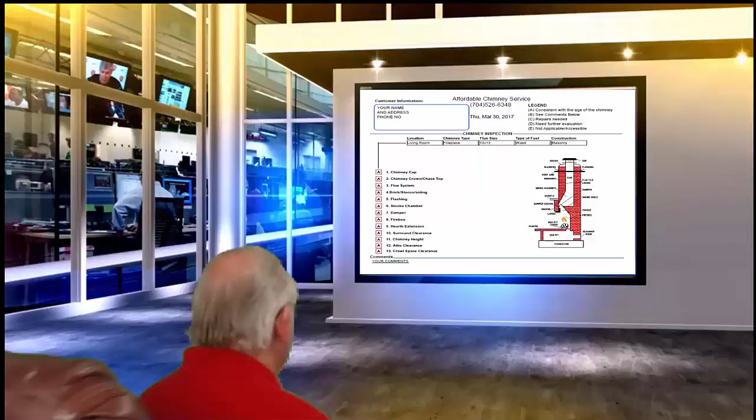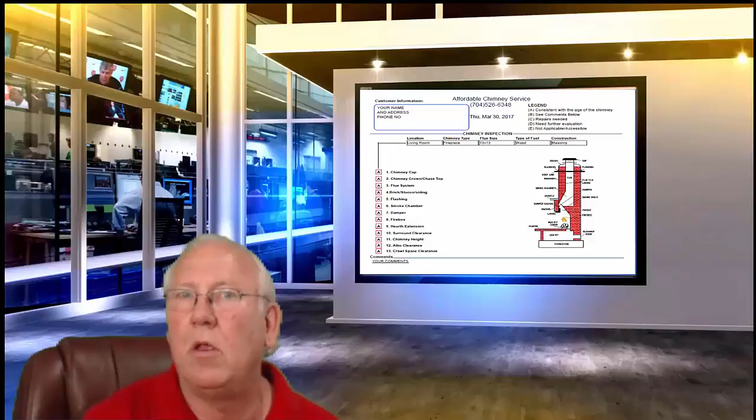I was just going over your chimney inspection report, but now that you're here, make yourself comfortable. Let's go over it together, shall we? Okay, now let's take a look at the inspection report and see how it reads out. This is a generic report. This is exactly what you will get, only your information obviously will be filled into all these blanks.

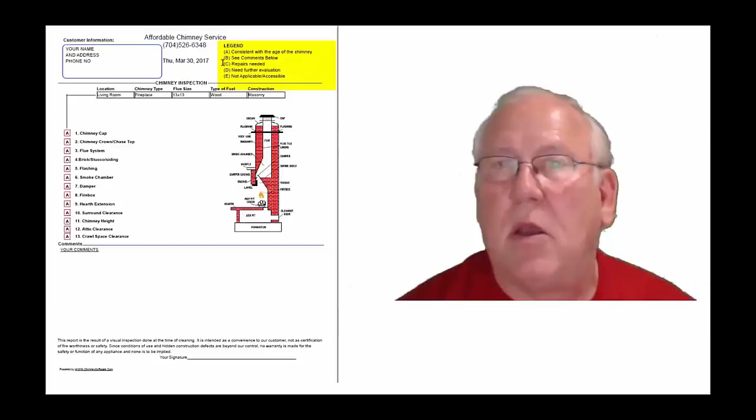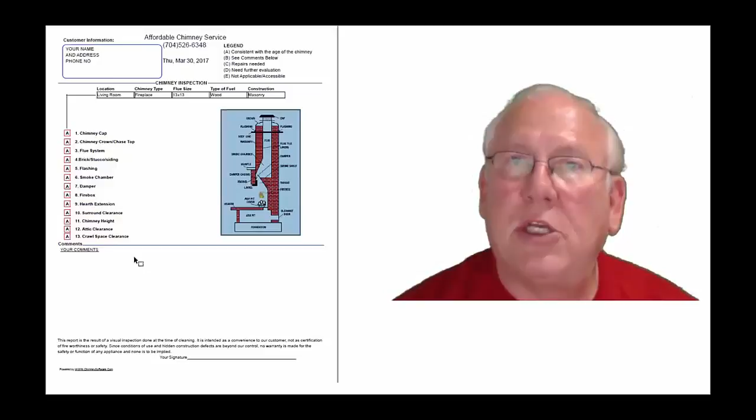The upper right-hand corner of the report is the legend. Each one of these initials pertain to something. A is consistent with the age of the chimney. B, see comments below. C, repairs needed. D, need further evaluation. Or E, not applicable. And they're placed into the boxes next to the parts of the chimney that can be easily identified in this diagram. And then, of course, you'll find my comments here below. Now, let's take a look at your personal report. So stay with me.

Hey, Sherry, it was great to see you out at the house today. Hey, what a beautiful house.

Great location, too. Let's take a look at the outdoor feature. This fireplace here is sporting vent-free gas logs. Just to refresh your memory, vent-free means complete combustion, no carbon soot, no carbon monoxide, so nothing coming out of that could cause harm to the people sitting around the fireplace. It's no different than a gas range in a kitchen. Blue flame, white tip, no carbon soot, no carbon monoxide.

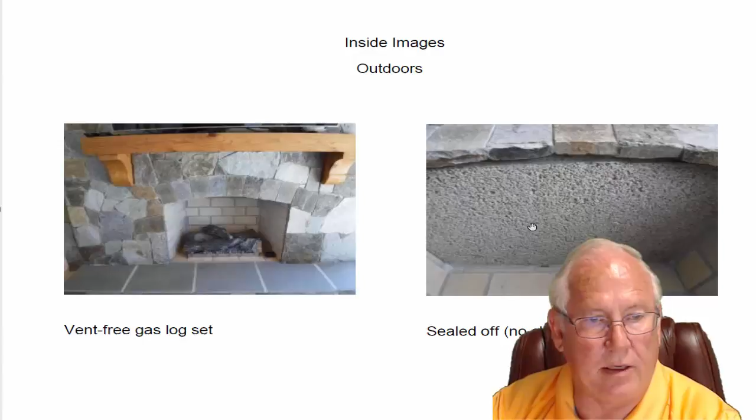And if you were to look in and look up, this is what you would see. It's sealed off. That's to keep the heat out of the body here, and that's a good thing. No problems with that. The gas logs, we had the pilot lit, but we couldn't get the receiver here to send the power to turn them on. So we even changed out the batteries with no luck.

I don't know if the old batteries had a lot of leakage to them, and I don't know if they corroded it to the point where it needs to be replaced or not. I'll leave that up to you folks. But I suspect once you get to the bottom of the remote issue that this thing's going to work great. Let's see. Let's go inside.

Living room has a working set of vented gas logs. It's using this little switch right here to operate. It also has a backup remote setup. We couldn't find the handheld part of that, so we just used the on-off switch here to operate it. Remember, on all vented gas logs, now these are vented, the one in the outdoors is vent-free.

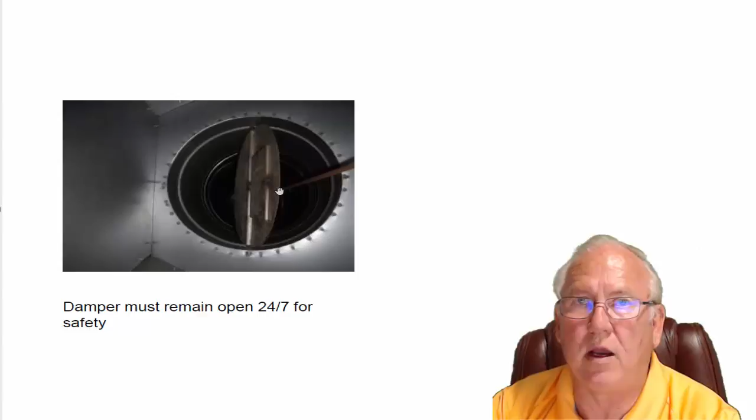There's a big difference. Vented produces carbon monoxide. So this damper must stay open 24/7. It's for your safety. Obviously, if you close it in the summertime and forgot to open it and fired up those logs, it would fill your house up with carbon monoxide. State of North Carolina wants that damper open all the time.

Now, you can check with your local building inspector for clarity, and he'll give you the exact specs on that and what exactly should be done. However, we did bring in a CO detector. Now, this one's not calibrated, so it is a professional unit, but it's not set up to give accurate readings of carbon monoxide. It's a tool that tells me whether carbon monoxide is a concern or not, and I found it not to be a concern with this unit.

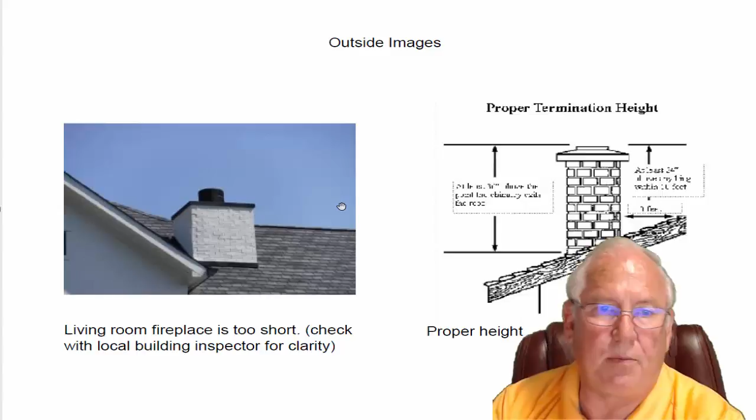So nothing appeared to be coming into the room, so I think you're okay. But that's something for you to decide, whether you should build the chimney taller. A short chimney causes a poor draft. A poor draft means that some of the fumes could come back into the house. It's just as simple as that.